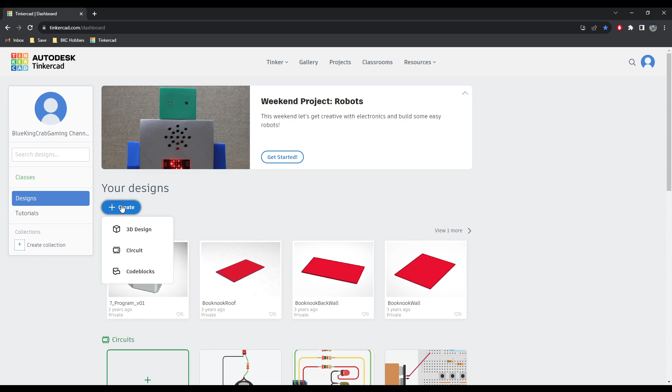create your own designs. Once you start creating your designs, you want to create a 3D design specifically, and then it'll load into this area here.

You can change some settings in the settings here. You can show the grids, show shadows, and set your unit of measurements if you want millimeters or inches. I'm going to use inches for now because it's easier for me to say.

I'm more fluent in that. However, I think it's way easier to measure in millimeters personally, right?

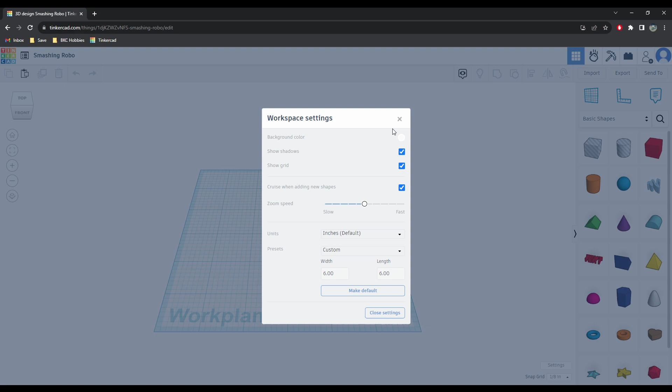And then you can set this width to whatever. You can set it to your print bed, which my Anycubic Mega X is basically a 12 by 12 inch, but I'll keep it small for now just so we can understand what's going on here. So the grid will just be 6 by 6, and then you can close the settings, and then that's everything that's going on here.

So once you get to this stage where you're ready to start pulling stuff in, this software is really cool, very simplistic, and I am not a 3D modeler by any means, but this is a very easy tool to use. So you can see here these are standard cutaway parts, and these are like standard just solid parts.

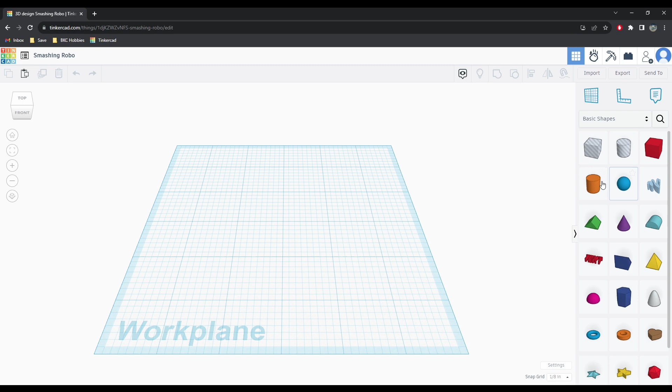So we're going to start off by taking a cylinder and just putting it into the middle of the build plate. So we have a cylinder here. There's a few settings on the right hand side here.

We have the number of sides. You can kind of see that it's very segmented. I usually just max this out, and then I max out the segments here too. Don't touch the bevel, we don't need a bevel. This is just to make it basically as clean as a cylinder as you can. I don't think this part really matters, but it's just something I do.

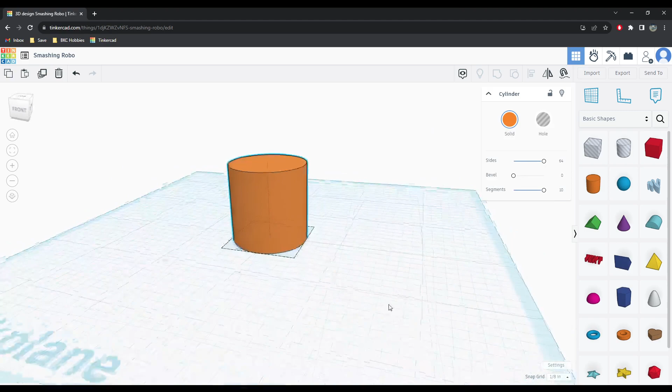So what this piece here is going to be is what we're trying to cast. So let's say we're trying to cast a model that is on a 2-inch base, or even a 1-inch base. I guess it doesn't really matter, but we can start off with a 1-inch base first. So with a 1-inch base, and we'll say it's higher than an inch, maybe 1.5 inches tall. So like this is the model that we would have. So it fits on a base. It's 1.5 inches tall that we want to cast, and this is the entirety of the mini.

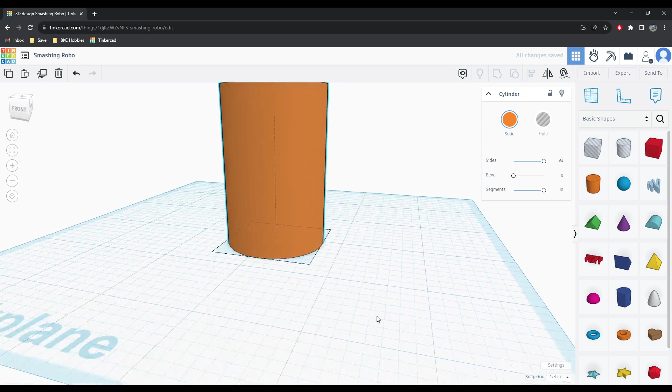So now, since we know how big the mini is, we're going to need to give it a little bit of room, right? So what we can do is, if you hold shift and click on this corner here, you can increase it. This is by 1/8 of an inch, and then that would be 1/4 of an inch. So now we have our model here that gives us our 1/4 of an inch all the way around our model, so there's more room for silicone and for us to get it out, and just room on top too, which we'll come back to as well.

But now, since we have that, this is going to be our cutaway piece. So you can actually see up here on the right hand side, we can keep it a solid or turn it to a hole. We're going to turn it to a hole. So this is going to be a cutaway piece from the actual model itself.

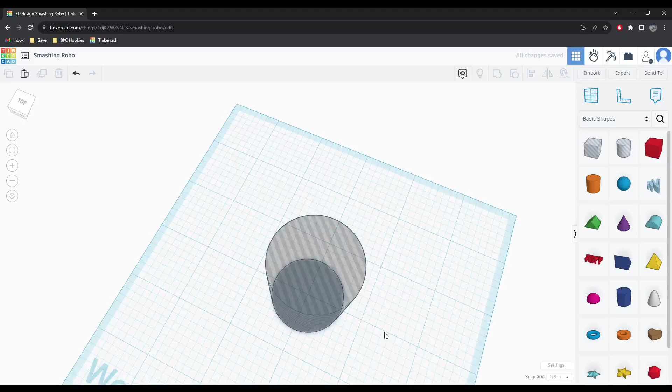So now what we're going to do is we're going to bring in another piece here. Same concept, just drag and dropped it, increase the size, increase the segments, and then what we can do is we can just match the size. So you can see it's 1 1/4. So if we go over here, click on this, you can see here 1 1/4 is basically 1.25. So if you come over here, click on this, 1.25, and then we'll come over here, 1.25. There we go.

So now we have our cylinder that way, and then we want it to be the same height. So again, if you see it, you can click here. You can copy it too if you want. Control C, and then you can Control V it if it copied correctly for some reason. Okay, I guess it didn't copy correctly. Let's try again.

Control C, Control V. I don't know why I did that.

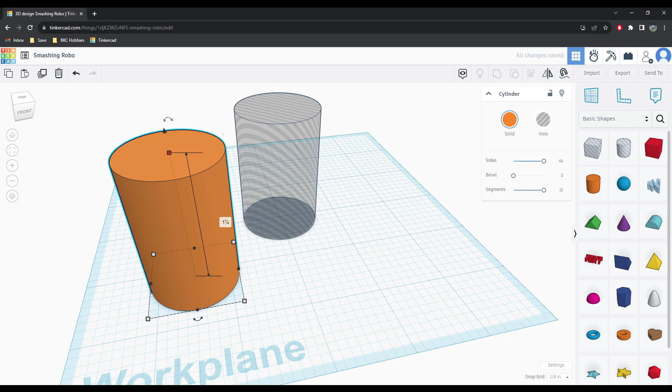Okay, so now we have our model, and how big we need it to be. The cool thing about this software is you could try to line this up manually like this. It's not too bad since we're using a very small thing, but let's say you have a bunch of pieces or a piece that you can't quite line up perfectly.

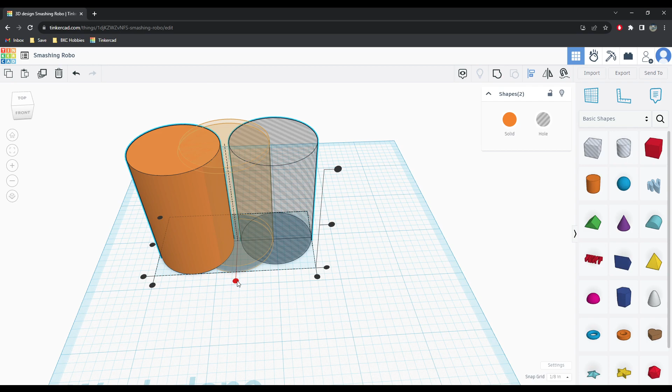You can grab both of the pieces by dragging and dropping, so now they're both selected. You can come up here to the top right where it says align, and these little dots come up. If you click on this one, it'll line them up in the center, and if you click on this one, it'll line them up perfectly. So now they're perfectly aligned with one another.

But now the thing of it is, we don't want this piece, we want this piece, so we need to increase the size of this thing. I like to do a half inch total on the entirety of the sides. So if you look at this...

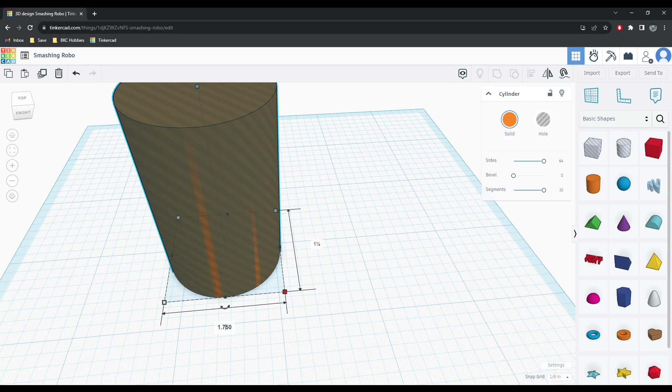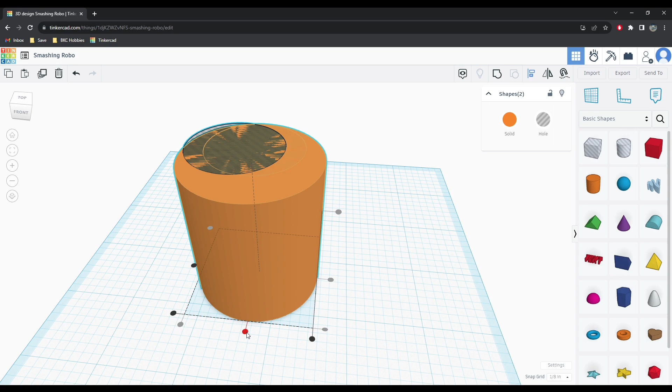So we can then select both pieces, because you can see that they're off center again, and we go align, and bring them back to the center, and there you go. So now we have basically a quarter inch on both sides of the cylinder, and we'll have a pretty good, decent size mold cavity too. This is going to be very hardy since it's a quarter inch thick, which is nice.

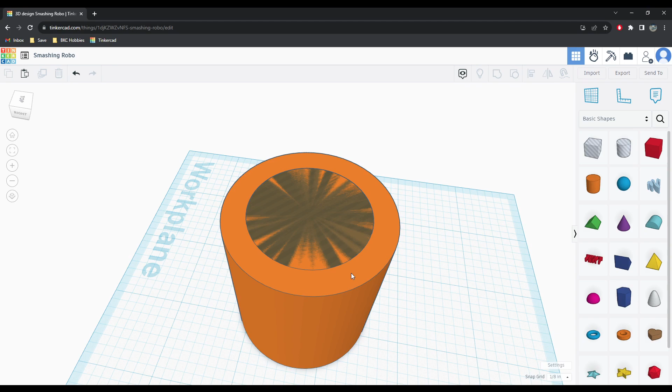But once we get to this stage, we can grab both pieces again, and there's this one up here where we group them together. So what will happen is we take the solid piece and the hole piece, and we get a cutaway piece. So now we're almost done.

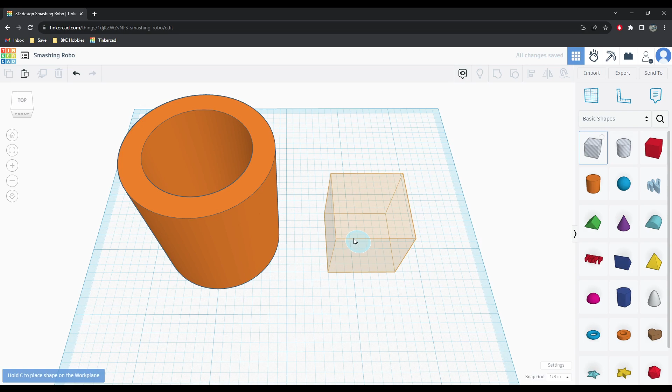And what we then have to do is, if you look at this, we take our 1.75 — you can copy that if you want — open up a calculator, paste it, divide it by 2, and you get 0.875. So what I like to do then is take a square, and on one of the sides, use 0.875. So we have the 7...

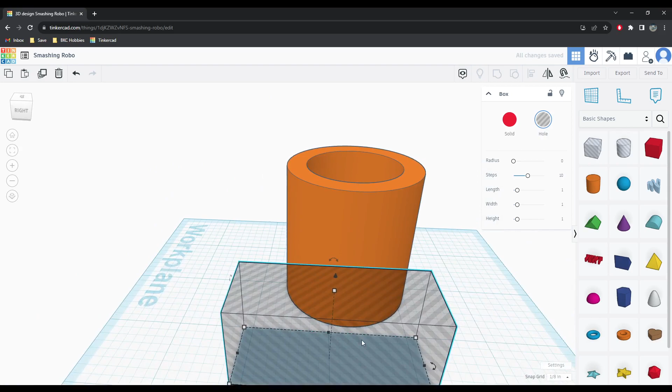Yeah, that's fine. We just need to make it wide enough. This doesn't have to be perfect, it just needs to cover the whole thing. And then it needs to be tall enough, so we'll just kind of go like that. You can see that these measurements don't really matter because we're just cutting it away. It doesn't need to be perfect.

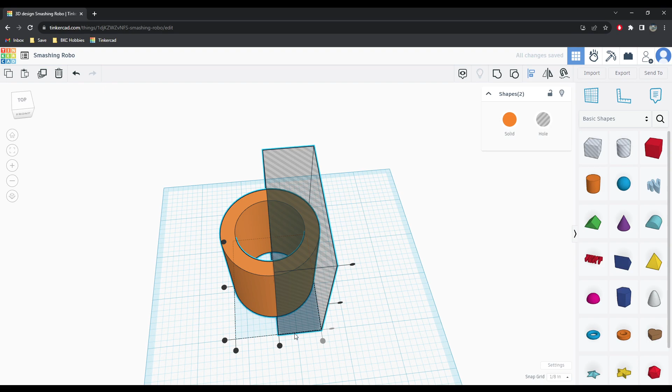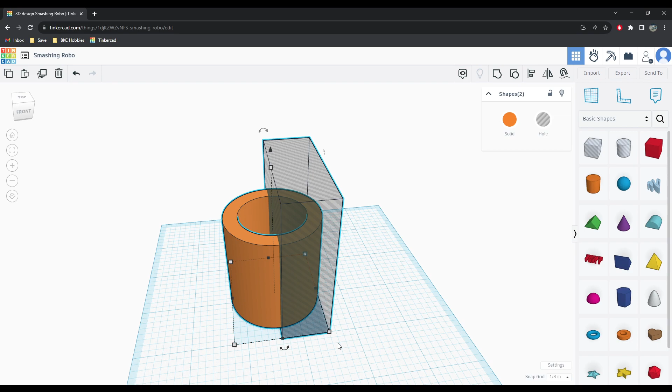But what we want to do is select both pieces again like we did before, go to align, and set them like this, then set them in the middle too so they're perfectly centered. That's going to be exactly half of our cylinder right there. So when we group these two together, we'll have a perfectly split in half piece. This is because we took the diameter of the circle and basically halved it, and that gave us our halfway point for the square that needs to be the cutting block.

So we'll group those together now. Bam! So now we have this piece right here. Pretty cool, so now we're halfway done.

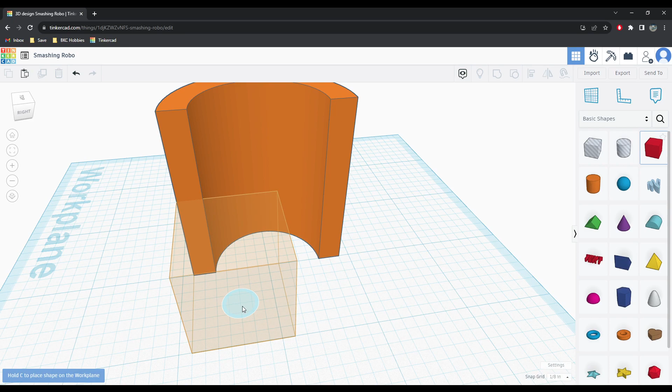The next piece that we need to do is grab another one of these, and we'll need to reduce this to this, reduce this to here, and increase it to here. So all I did was basically make a further piece inside of this. So now if we zoom in one more, you can see we make an eighth of an inch. I feel like an eighth of an inch is a pretty solid unit of measurement for this.

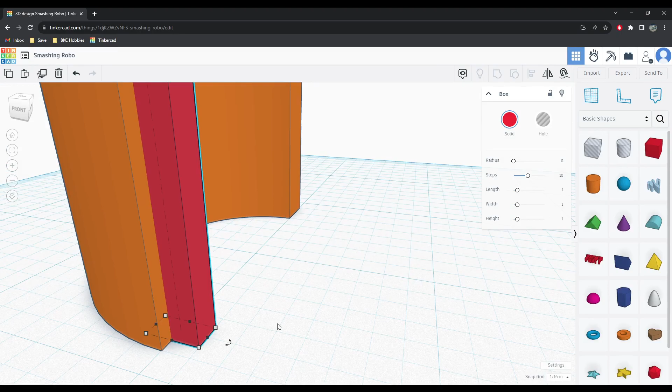So what that did is put us right into the middle of where that seam is supposed to be. This is a pretty big piece, so we could minimize this just a little. We'll take it in one, but see how it's too small? If we go in another to a 32, that should be half. Then we'll increase it again to 1/64 to move it over. Now you can see it's in the middle of the two pieces.

Now we need to duplicate this. If you hold Control and press D, you duplicate it. Otherwise, the other option is to right-click it and copy it, Control C, Control V. Both of those options work.

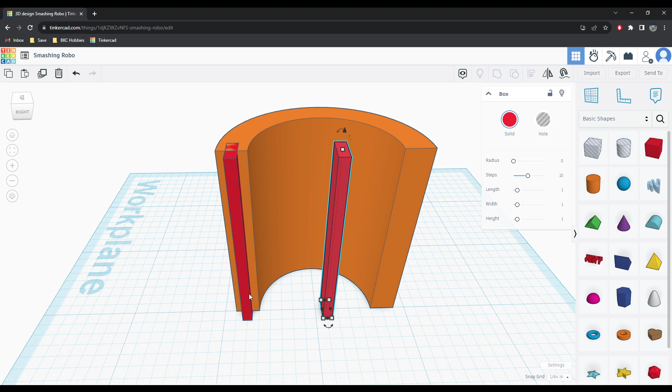So now we're going to move it over to here, to the other side. Now we're in the center again, you can see, but we want a little bit of extra clearance. So if this side's the male end, we need this side to be the female end. But the female end needs to be just a hair larger.

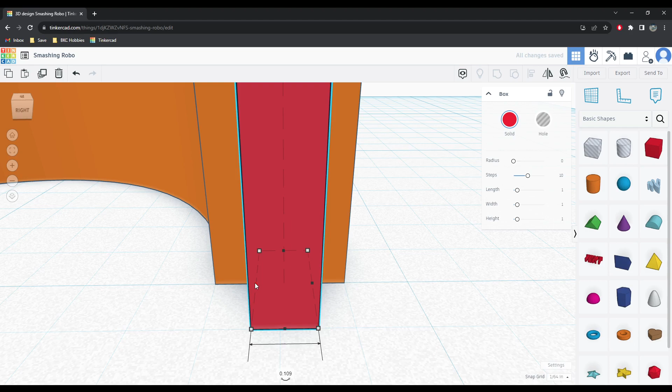So what we'll do is increase this side and this side by just a hair. Again, it's just a small amount, we're doing 1/64 of an inch. So it is a little bit larger, but not a huge amount. But we need this to be changed to this, right?

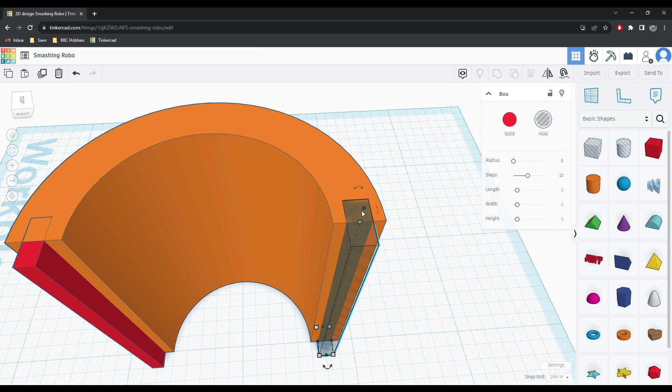Now there's only one other thing we haven't done: we haven't increased the depth. So the depth is still the same, but I don't want to increase the depth this way into the actual mold casing. So what we'll do is just reduce this one by 1/64 of an inch. So this side has been reduced just a little bit.

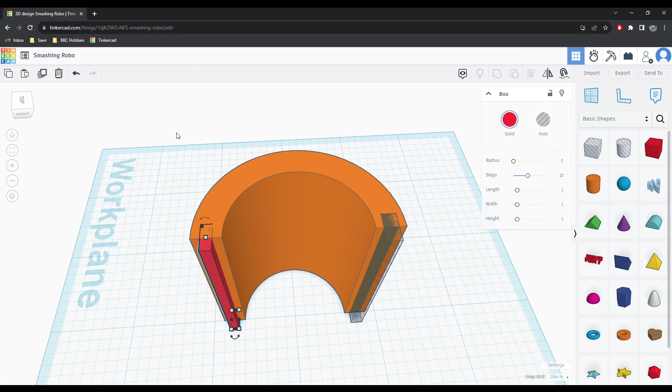And now what we'll do is select all of these pieces, merge them together, and there you go - we have our mold cavity. Now you're probably thinking, well, this is only one side.

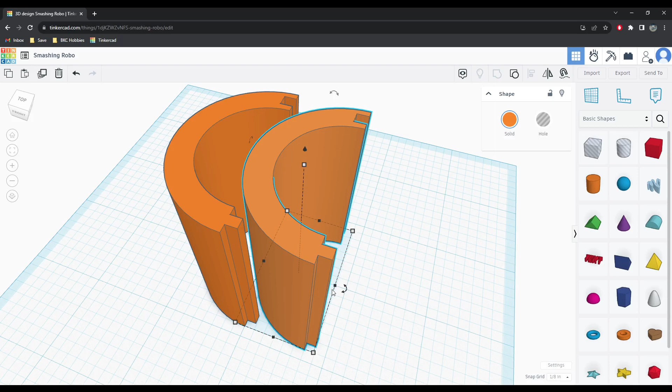So if you duplicate this with Control D, and we'll also increase this to 1/8 of an inch, you'll see that the way this is set up, you actually don't need two - you only need one. So if we look here, and then move it back a little bit, it's a little too close.

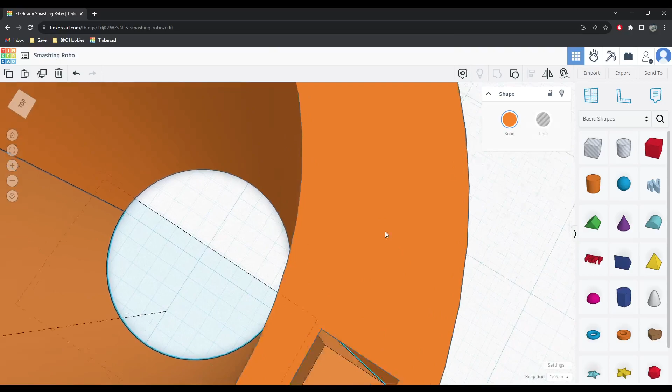You can see here that no matter which way, if you print two of these, even in the same orientation, they'll always merge together like this because of the male and female end being perfectly matched. You can kind of see this is maybe a little too much space here, but you got to remember we have a bit of play with our printers. So I like to keep it like this, just like a 1/64 of an inch.

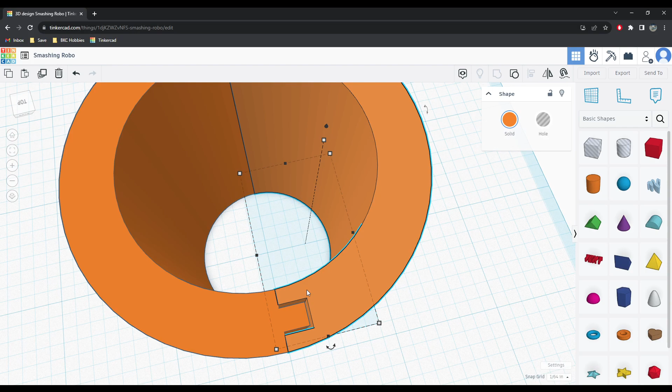It looks big here, but once you actually print it, it's not that noticeable. Again, you could make this smaller if you want to try to hone it in to make it perfectly tight. I don't really mess with that too much. But that's it - that's the whole process on how I do these.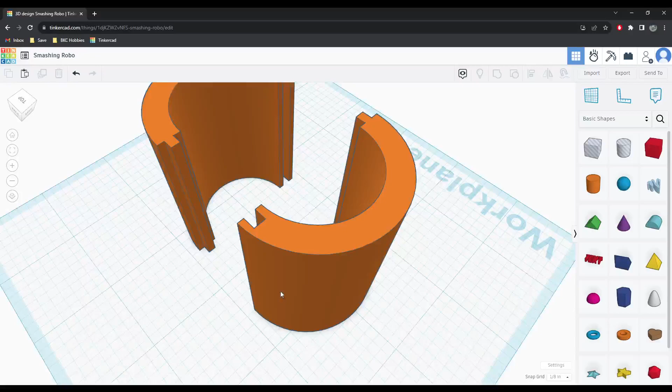I usually measure the piece on what I want. So we start off with an inch base and about 1.5 inches tall. But if you needed something larger, you would just do the same process, just measure them larger. The squares, or rectangles for that matter, are exactly the same - we create the size we want, the surface area, and then subtract with another square in the middle to see how much we need to remove.

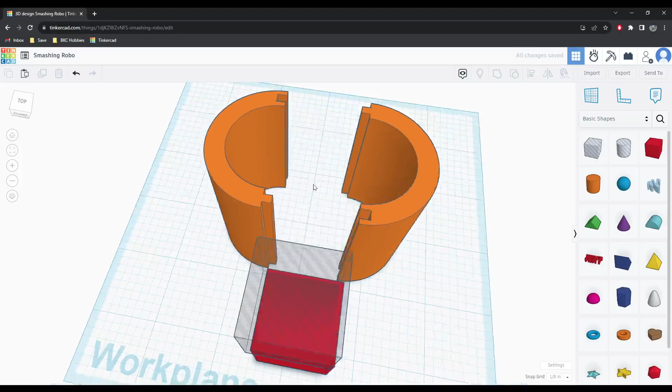I like doing circle casting molds like this for ones that might have a cut, for a cut mold, and I like using squares for my dump molds. I just find it easier personally because a square is a little bit more robust in its corners, whereas in a circle mold it usually doesn't have as much resin or silicone, which is nice, but then the resin that goes into it is very close to the edges and could cause damage when trying to push out without a cut.

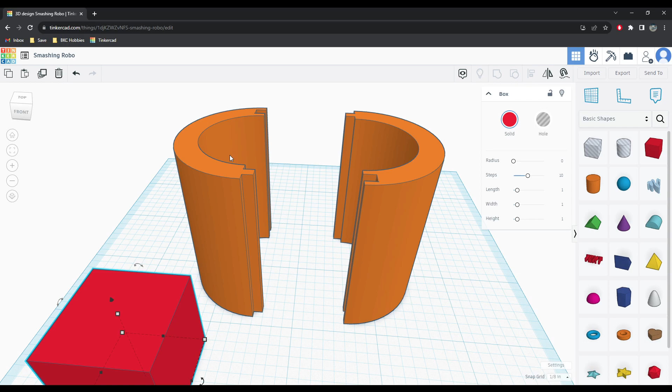So that's it, I hope everybody enjoyed this video. Oh, I should probably show this first, actually.

So we can rename it. We'll do 1 inch by 1.5 inch caster mold - that's usually what I call it.

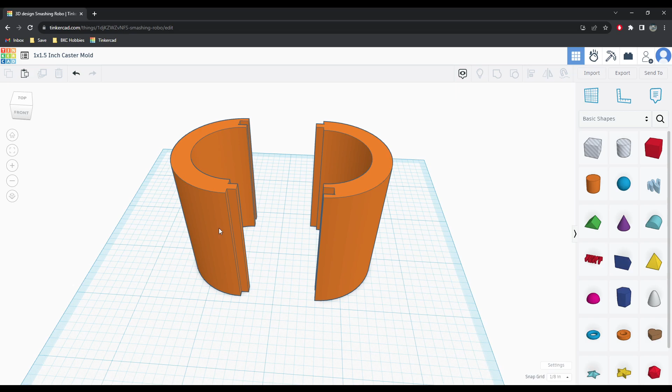And then what you can do is select one of the pieces. Once you have both, you can even delete it, it doesn't matter. You can delete it and export, and you can do it as an OBJ, an STL, or whichever one's your focus - I usually do STL. You just download it, and you're good to go. Print it off, print two of them, and you should have yourself a caster.